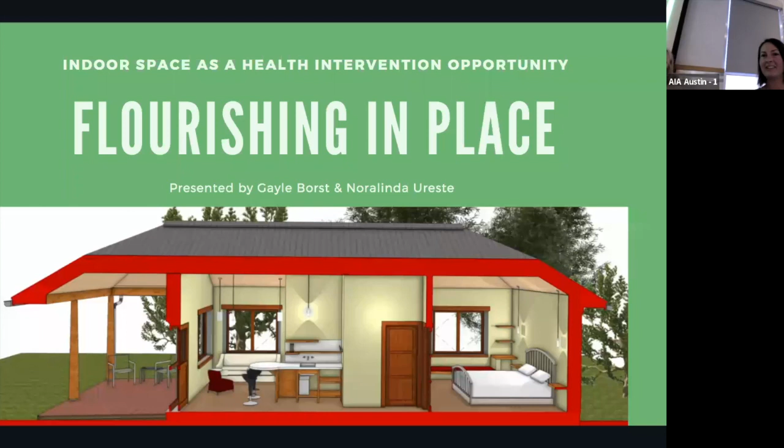But anyway, if we're a little rough around the edges with our presentation, forgive us. We've both been out of town, and so we'll see how flawlessly we can switch, but we'll give it a try. Thanks, Gayle. Okay. Okay, thank you. Oops. This might not. Trying to advance. There we go. Okay. All right. Thanks, Gayle. Thanks, Ashley.

Thank you, Kate. I just wanted to briefly go over what we're going to review today. I'm going to talk about the motivation and the opportunity that we saw when we wanted to embark on this project. We want to talk about enclosure strategies to mitigate building failures, and then also to maintain the indoor air quality, really the environmental quality of the spaces.

And then we're going to describe how building with natural materials reduces chemical exposures and improves human health. And then we're going to talk about strategies for creating an indoor air quality redundancy with robust mechanicals. And then finally, strategies for reducing chemical exposures from water and promoting human health.

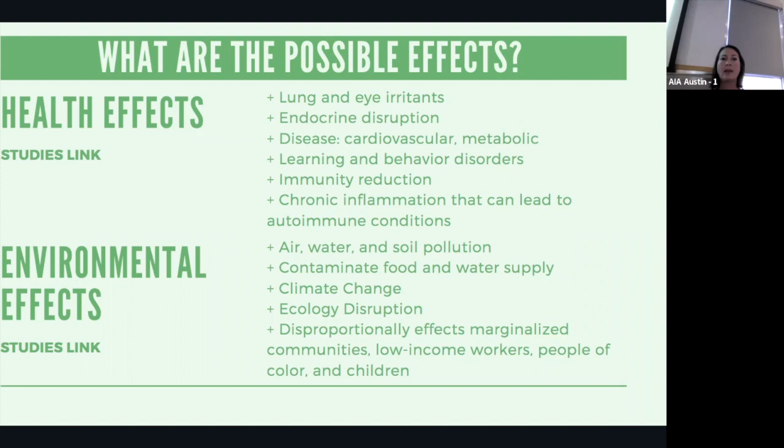So the opportunity here, after discovering how ecological and human health are intrinsically linked, and learning how little oversight there is over the chemicals that go to market, and then understanding, after looking at building science, common design practices that can be risky for human health, and then discovering how our building materials and our tap water can be a source for chemical exposure. And then finally learning that budget and schedule are put many times before occupant health.

And so with that motivation, Gayle and I had the opportunity to use the precautionary principle to make choices in design and building material selection and our mechanicals, and the potable water that we want to supply to the vacation rentals to create an environment that would act as an intervention for health, not just for people that are chemically intolerant, but also for children and anybody else that is seeking wellness. So yeah.

And so I want to list the opportunities and strategies. We looked at lots of stuff. We looked at the materials, we looked at the design, we looked at the mechanicals, and we looked at the water that we're going to be providing for the occupants. And we came up with a long list of things. I won't go through all of these. We're going to go through most of them in the slides.

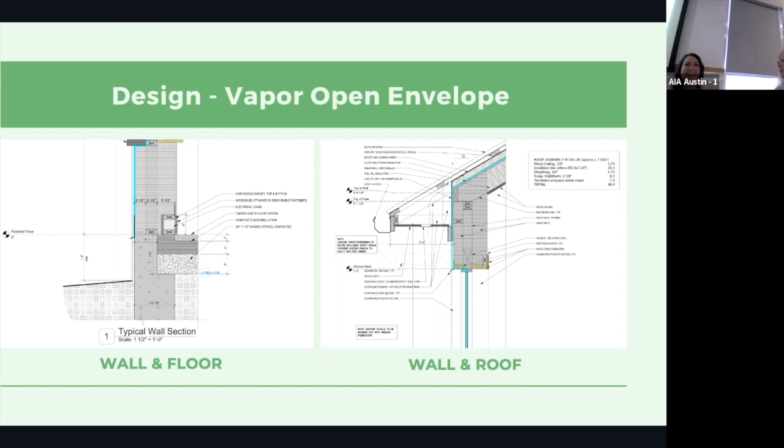Can I make one quick comment? Absolutely, please. So it is my humble opinion that the conversation about vapor open versus vapor closed in most situations is less important than the conversation about air tightness, because in a hot, humid climate, on the order of 96% of moisture or vapor coming into the home is air transported. It's not transported through vapor diffusion. So you have the mechanical means to dry. So long as your rate of drying is quicker than your rate of wetting, then you're going to be in good shape. And of course, the wall assembly is designed to drain as well. So we're talking about two different things there.

Yes. So are you saying we're putting too much emphasis on too small a portion of the year? It's like 4% over the year. We've done pretty extensive WUFI modeling on this, and I found that it's neck and neck with a Lumaflash and/or a Delta-Dry or Delta-Vent. So you have done WUFI studies on it? Yeah. That's what I was going to ask. I have not. We've relied on these guys. We've done some extra modeling on the hempcrete stuff as well. It's a great product. So anyway, I don't want to sidetrack us. Just wanted to throw that in there. In case y'all didn't know, that was Miguel from Positive Energy.

Just moving forward, the people on Zoom are using the phone, so they can't really hear those conversations. Repeat what the question was before you answer it. Okay, thank you for that. Yeah. Okay.

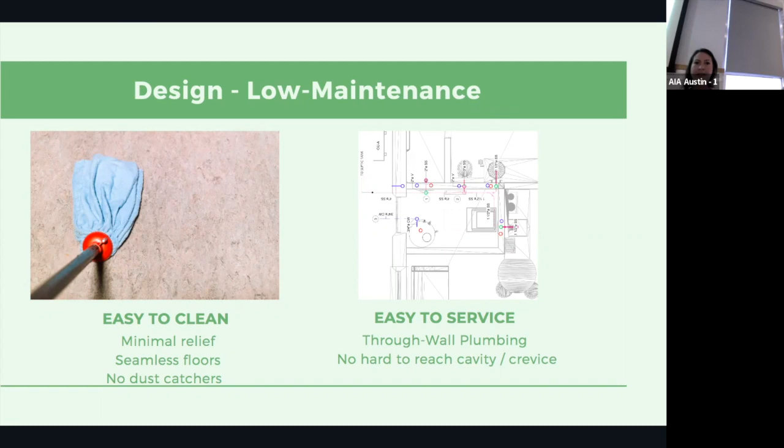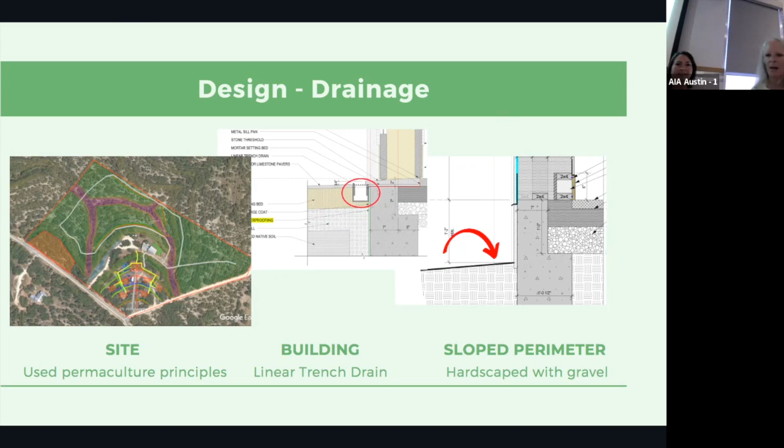Yeah. And I will say we did an earthen floor off of 45th Street, which is in a high clay area with no vapor barrier, and there have been no moisture problems with that. So I feel quite good, but the conditions are right here. Yes.

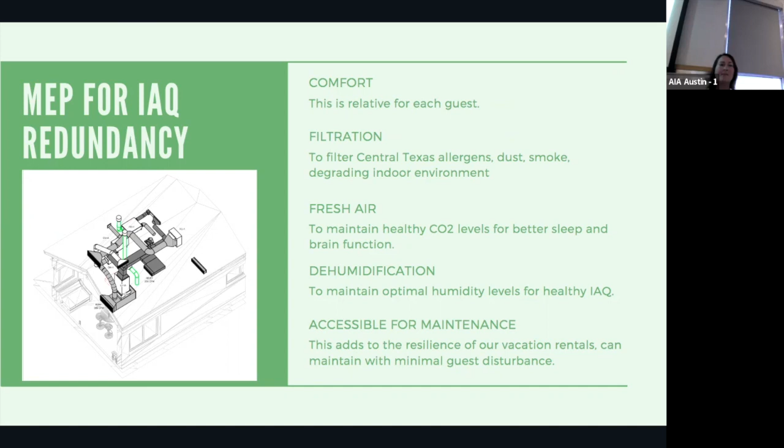And we wanted to make sure it was accessible. So like we were talking about earlier, to be able to maintain it while a guest might be staying there without disturbing them. And then also change filters. Yeah. Do you have the video of this very complicated looking big system for such a tiny cottage? But hey, that's what it takes. Walk us through, Miguel.

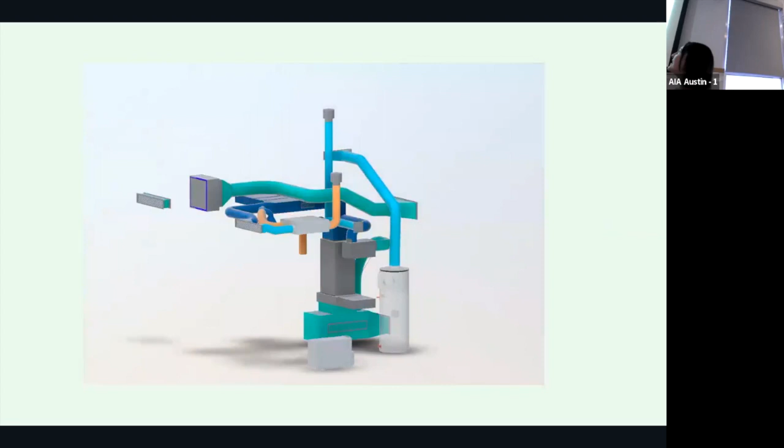Do you mind pointing just with the mouse? Oh, sure. So here's the water heater, of course. I believe this is in the back right now. Yeah, this is the air handler, and this is the ERV for fresh air. These two ducts go to the bedroom. Yeah, I think. We did the dehumidifier underneath.

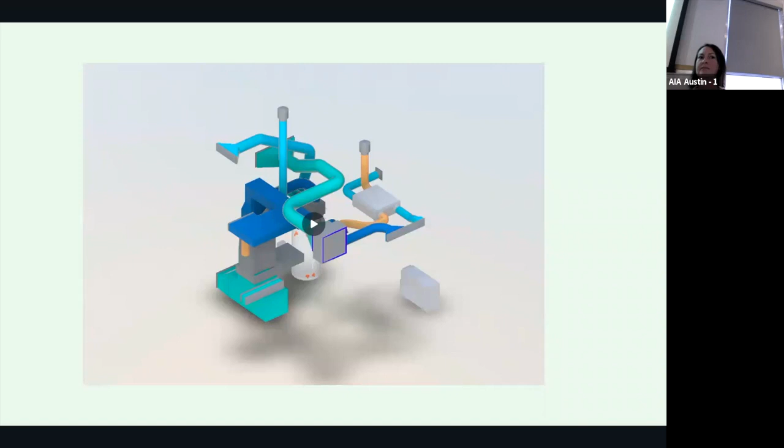So you did a separate DU in this house, Miguel? Yep. Always do that. In addition to the ERV, or was it part of the ERV? It's its own unit. So dehumidifiers handle humidity, ERVs handle ventilation. Okay. And that was purposeful. Alrighty. So no accident.

And then I just wanted to talk about rainwater harvesting as an additional means to mitigate chemicals and pollutants in our water. Maybe it's not fairly common, but it's not uncommon in the Texas Hill Country to harvest your rainwater for potable drinking water. And that's what we use at our house, and we love it. And so that's what we wanted to do for the vacation rentals as well.

And we chose to do this because with the low contaminants, it has no fluoride, no chloramine, which are both neurotoxins. We are going to be storing it in a plastic-free cistern. Through our research, we learned that most cisterns or tanks are lined with some kind of plastic. And we really want to avoid using plastics because of their endocrine disrupting properties. And then there'll obviously be filtration. We decided to do a ferro cement tank, which has a long life.

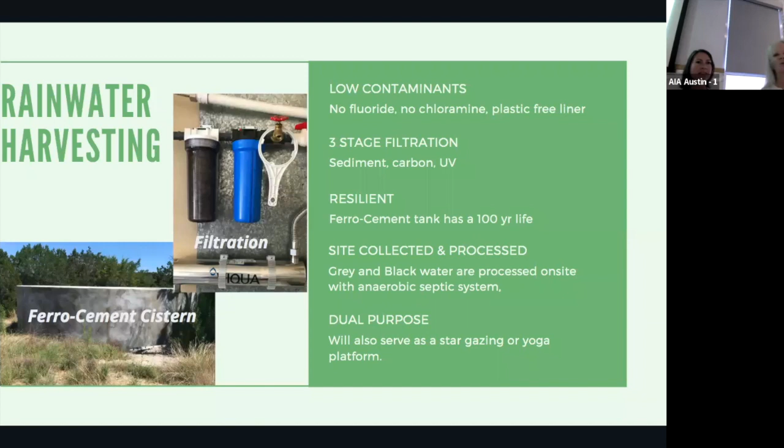We've had some problems, and we'll talk some more about problems, where we were going to have to do a damp proofing as another step. But if you add the Xypex admixture, you should not have to do that. So we're learning here.

Might this be good to talk about Peter's earlier question about plumbing piping and connections? We went through quite a study of different plumbing piping, especially for the potable water. So it's going to be all copper on the potable lines, correct? Yeah. And we found some connectors that enable us to not have to use solder, because solder still has heavy metals in it. So we're looking at every little bit, especially when it's going to be consumed. And that's inside of the mechanical room that will be copper, but we're doing HDPE for the supply line coming from the cistern.

Which brand are you doing? High density polyethylene? Yeah. So PEX, the Uponor line of PEX, you find that's not a really good one? Well, for inside, or do you mean coming from? Instead of copper, all your supply for potable water. I guess we found that HDPE, one, it has a much longer life. Sure, but it's like PVC.

It is. And so I felt like there can be some leaching with the PEX. And I felt with HDPE, at least at the end of its life, it's recyclable. And I felt there was no really good solution for pipes. And all the HDPE is on the upstream side of the treatment. So once the water is treated, then it goes into copper. So you're actually sucking water from the rainwater system into the treatment?